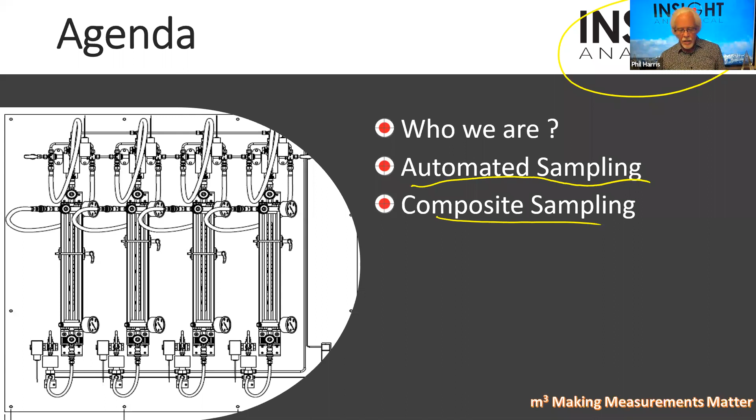Insight Analytical is a Calgary-based company. We're a systems integrator and distributor for other manufacturers. We operate a Northeast Calgary, 20,000 square feet facility, 9 bay doors, 10-ton overhead crane. We can pull a full analyzer building in off the back of a flatbed, drop it off inside, do all the systems integration, and lift it back out again.

We're an AB 83 compliant fabricator. For those of you who aren't from Canada, that probably won't be significant, but in Canada we have CRN numbers, where we have to have a Canadian registration number for anything that's pressure containing and going into a process facility. This just means we're compliant with being able to do that kind of fabrication. We put CRNs on equipment for Alberta, BC, Ontario, and Saskatchewan.

Personally, I come from a background with a company called Western Research. We developed analyzers for sulfur recovery units and for natural gas processing, and this company has been around for over 50 years now. A bunch of the people who work with me have all come from there, so I've had the benefit of bringing in people with a lot of experience in this industry.

We have excellent documentation capabilities, and this becomes really important when we're working with large engineering companies on projects. My drafting guy is fantastic and has been doing analyzer drafting and analyzer system drafting for over 30 years now, so we do a really good job on the docs packages. I'm really proud of what we do there. We've had compliments from engineering companies, and that's hard to get usually.

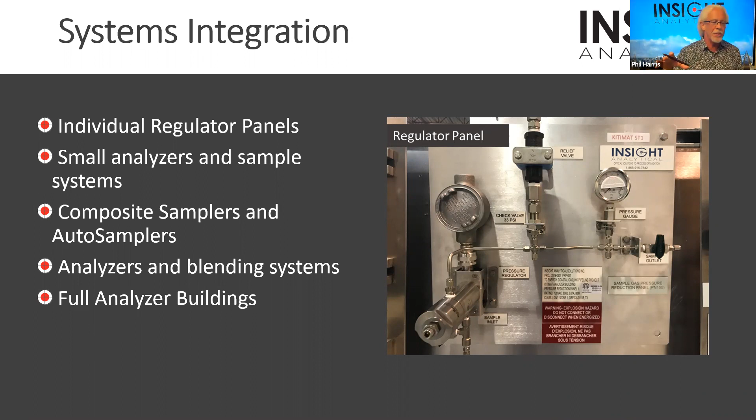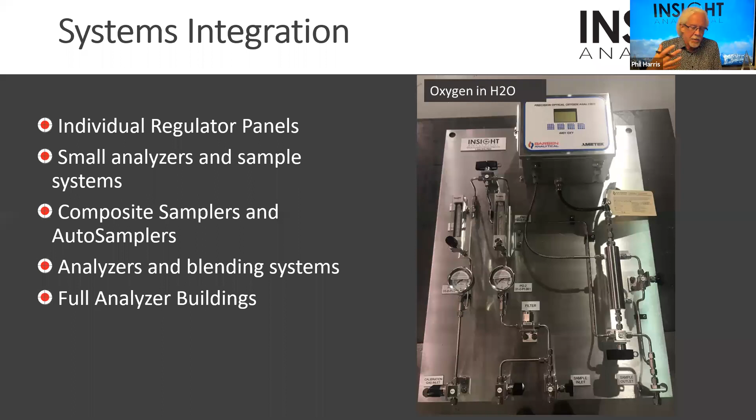As I said, we do full systems integration. We'll do everything from little grab sample panels, individual regulators - we did all the sample systems for Coastal GasLink Pipeline for TC Energy - to small analyzer panels, like this little oxygen, dissolved oxygen in water analyzer. We've done dissolved oxygen in hydrocarbons, and we'll integrate the sample systems, small sample systems, around analyzers.

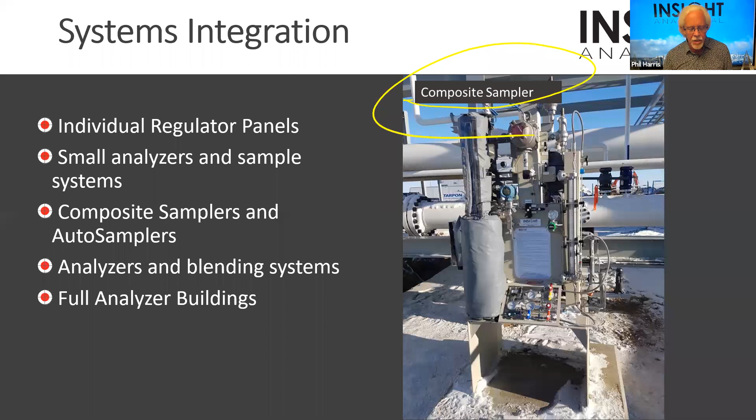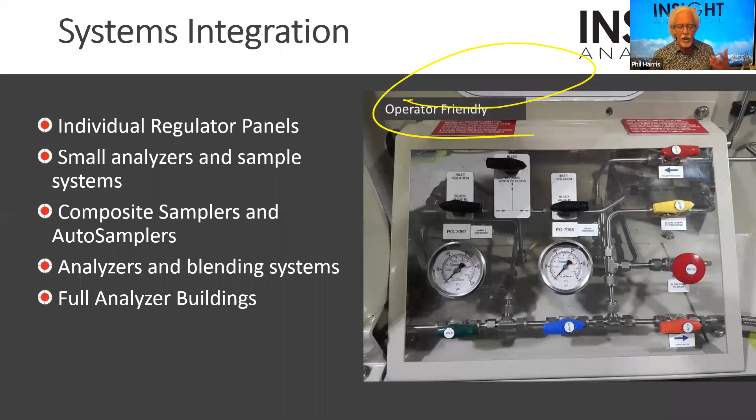Second, we put together full composite sampler systems, which is one of the things we're going to talk about today. Again, we come with a lot of industry experience, so we come at this pretty honestly - we know how hard it is to do things in the field sometimes. You'll notice on one like this we've got a little instruction panel for how you're going to use this device, put right onto the back of the composite sampler. All the instructions for how to charge the composite sampler, pull a sample off of it, etc., are right there. You'll notice there's a bunch of colored valves at the bottom - those are all covered in those instructions. When we put a system together, we try to make it as operator friendly as we can.

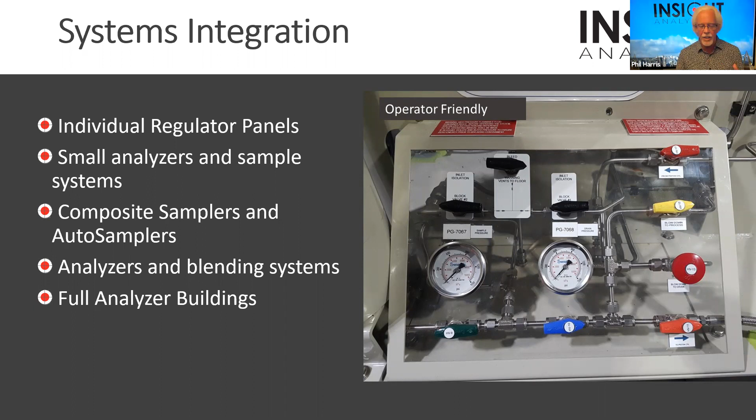So we know lamicoids fall off in the field and get sun bleached. So we'll do things like color code valves and use different shaped valve handles, so we can make it easy for operators to understand how to actually use this device. If there's a pattern or sequence that has to be followed, we want to make it easy for an operator to follow that sequence when pulling a sample.

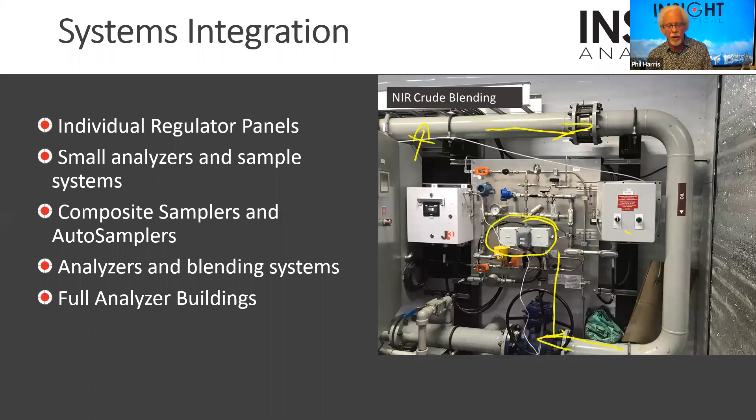We do analyzers for crude oil blending, or for blending condensate into crude, or butane into crude for vapor pressure control, or for sulfur blending. This one is sitting on a crude oil blending skid. We've got crude running through these pipes, and they're injecting butane upstream of where we're measuring. We're pulling a small sample off to a little infrared optical bench right here, connected by fiber optics to an analyzer over here. We use that infrared analyzer to do real-time vapor pressure measurements, so we can monitor the vapor pressure of crude as the butane is added, trying to hit pipeline specifications.

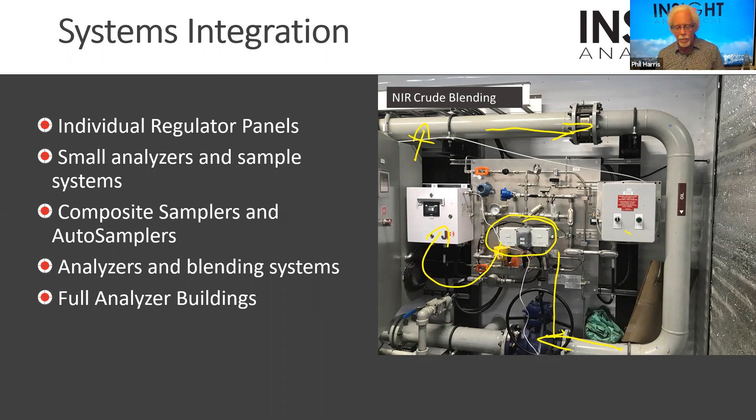Oops, let me get rid of my ink here. When I animate these slides, I end up with all kinds of drawings on there.

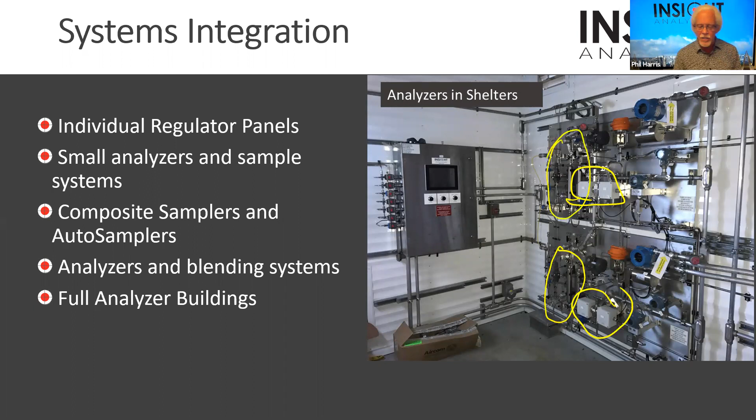When we do automated sampling panels, we can have multiple cylinders. In this one, there are 4 floating piston cylinders sitting there waiting to be filled. You can see the actuated valves above and below. We control the entire fill sequence with a PLC sitting off to the right. We build all the code around it to control that sequence and how those get filled. There's a control valve up top controlling the fast loop through a shelter, a Coriolis meter, and a couple of analyzers tied to this whole thing.

One of my favorite pictures is this one, where that same panel is there along with 2 composite samplers. We have an automated toluene flush. A lot of times when dealing with some of these hydrocarbon liquids, they're really waxy, and you can get systems that plug and wax off. So we build a system in place that we can fill with toluene and back flush the entire system automatically, cleaning out the sample system as needed. In this case, we have an infrared analyzer that can see a change in how much light's getting transmitted, letting us know we've probably got some wax buildup in the cell, so let's give it a back purge of toluene.

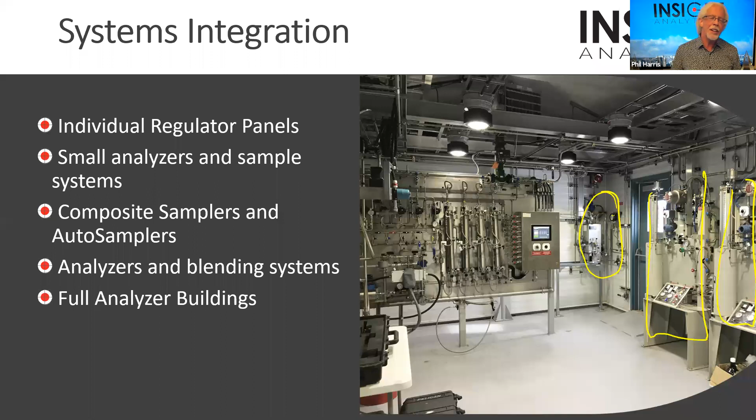On the integration side, we're willing to take a look at pretty much any kind of package, large or small.

Now I want to move on and talk about sampling hydrocarbons. There are 2 kinds of samples that commonly get taken. One is what we often call a grab sample or spot sample, and when we do that, we pull that whole sample at once. Imagine if my glass of water was my sample: I walk out to the valve and say I want to see what's in my water right now, and I fill this whole glass up. So that sample reflects what's in the process at that moment in time, assuming it was collected properly and wasn't biased in any way by how we took it. We want to talk a bit about that, because that's one of the things we try to deal with when we automate a sample system.

The other type of sample that often gets taken is what we refer to as a composite sample. These are samples taken periodically over time. Imagine instead of filling my glass up all at once, I let the water drip in over the course of a day. What would be in the glass at the end of the day reflects the average of what my water looked like during the course of the day.

These often get used for custody transfer, when I want to know what a particular plant or producer shipped. I always like to pick on Dale when he's here because I know he's a good sport. Dale's a producer of crude oil shipping it into my pipeline. I want to take a measurement over the course of a day or a week to know what he gave me on average. This lets me know, if I take that sample over a period of time, whether on average he was on specification.

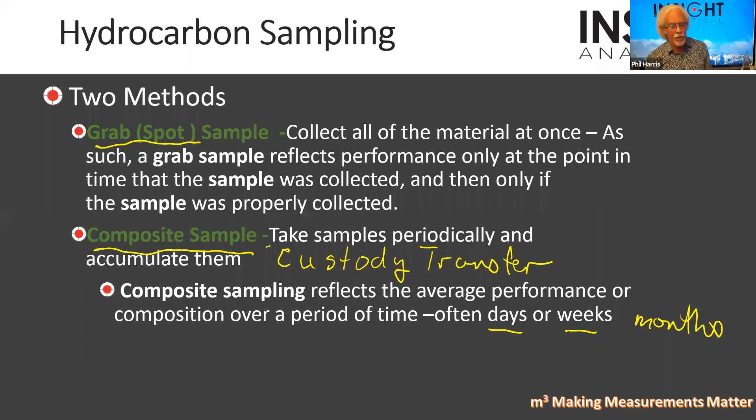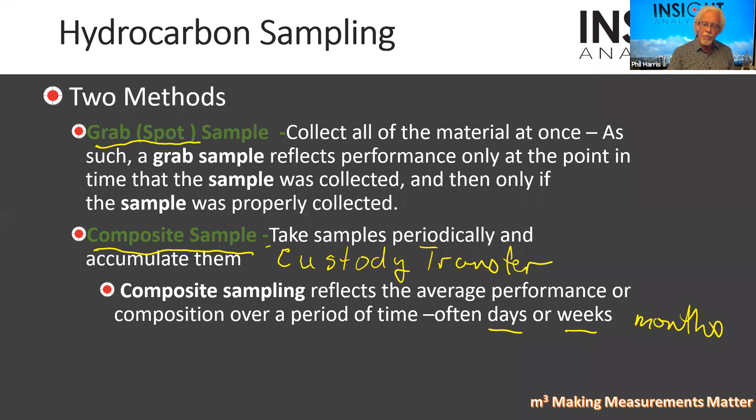Good question. There's both. So usually it's a contract between the producer and the supplier that defines kind of what they're going to do and how they're going to do it. But on the natural gas liquid side, so things like propane and crude and condensate, a lot of this gets covered by Directive 17, Alberta Energy Regulator. So AER has some specifications as to how composite sampling is supposed to be done, and how, because again, some of this reflects back to how the tax revenue gets generated too - to know the value of the product that went through there. So of course there's a government involvement as well.

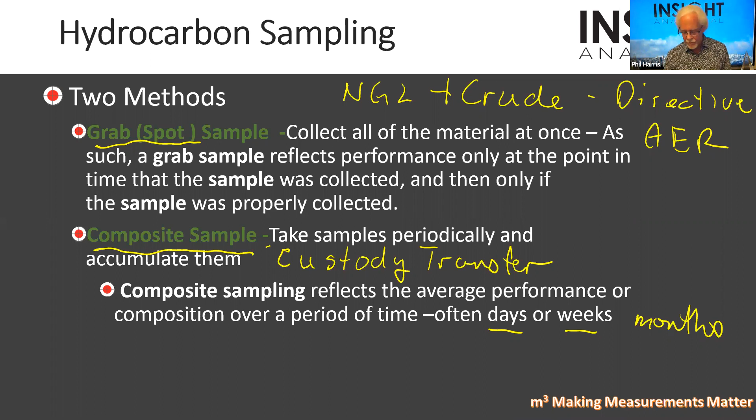So we commonly do spot samples or grab samples if we want to try to evaluate how a process is running at a certain time and under known conditions. So we'll go out to the field and pull a sample so we can take it back to the lab, or to an analytical company that's maybe on site doing testing work for us, and let them make some measurements of how our process is running. And then we can use that data to further optimize our process. So we may pull these so we can get some idea of where we're at and do some process optimization.

We may also just want to measure our product quality under known operating conditions. So if I'm running a condensate stabilizer and I'm trying to boil out enough butane to hit a certain vapor pressure specification or hit a certain C4 concentration that I'm allowed to put in the pipeline, if I don't have an online analyzer there, I want to go out and pull a sample and see how we're running.

There are also types of analyzers that we refer to as inferential analyzers - things like near-infrared spectrometers, nuclear magnetic resonance analyzers, Raman analyzers. A lot of these have to build a model in order to predict what's going on in the process, and they build the model by comparing spectra that they measure against known process samples. So we sometimes are pulling these grab samples so we can help ourselves build these models. So there's a bunch of reasons that we want to do them.

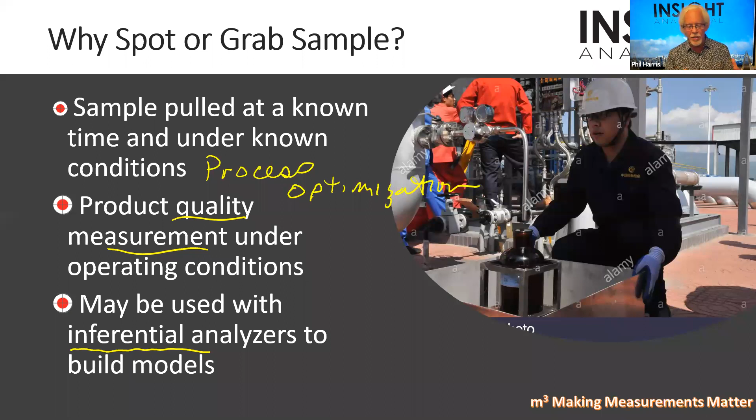When we do these for volatile liquids, for things that are going to bubble fairly easily, we want to make sure that we get a representative sample. It's always a big deal in our industry. We want a sample that really gives us representative information about what was in the process.

If I had a water bottle right here, or a bottle of 7-Up, and I wanted to measure how much carbon dioxide was in that bottle, I'd have to make sure I didn't take the cap off first, because as soon as I let the pressure off, those bubbles are going to escape and I'm going to lose some of that carbon dioxide.

So when we want to take samples that we know have dissolved gases in them, or that have very high vapor pressure, we want to pull those samples in a way that ensures those volatile things—the propanes, the butanes, the H2S, the carbon dioxide, whatever they are—don't escape.

There are 2 common methods we use to do that. We'll either fill what we refer to as a floating piston cylinder—you won't have to zoom on this because he's pretty big—but floating piston cylinders are basically a steel tube that have a piston inside of them.

What we do is we back pressure one side of it with nitrogen and push that piston right to the top, connect it to the process fluid we want to measure, and then start bleeding that nitrogen out. Slowly, as the process pressure overcomes the nitrogen pressure, it pushes the piston back, but it keeps the whole sample under pressure the whole time.

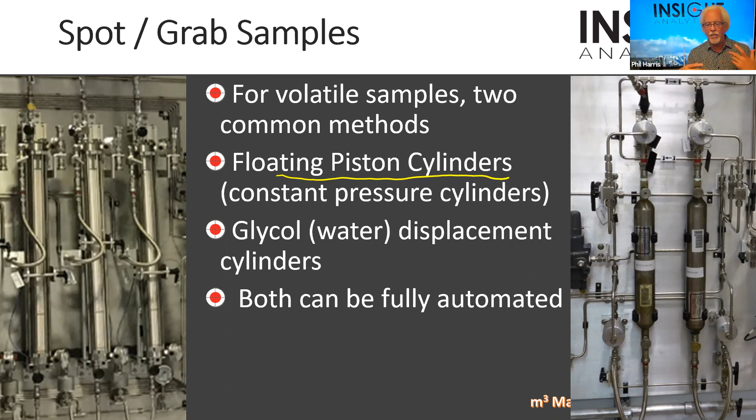So the issues that happen with manual sampling are often that the proper sampling procedure isn't followed.

Organizations like API, American Petroleum Institute, Gas Processors Association, the GPA—they all write specification documents. Crude Oil Quality Association writes a specification document that says this is how you should properly pull one of these samples. A lot of people don't read the manual.

They just say, I'll just pull it the way I learned to do it. Joe showed me how to pull a sample 10 years ago, I'm going to go pull it that way. Well, a lot of people don't pull the sample properly.

Then they don't write down the information properly. If you're in a refinery and you're the guy who's supposed to pull the 2 a.m. sample off the bottom of the debutanizer, and you're walking by the debutanizer at 1 a.m., you pull a sample and you write it down: that's my 2 a.m. sample, because that's when you're supposed to pull it, and you were there earlier.

So now they go back and try to compare that sample to operating conditions, and they go, geez, it doesn't look anything like the way we thought the debut was running at 2 a.m.—because it wasn't a 2 a.m. sample.

The other issue we have with manual sampling is we maybe don't have anybody available to pull the sample. Plant goes into upset, I want to pull a sample. Plant's in upset, all the operators and technicians are scrambling to try to get the plant out of upset conditions. There's nobody available to go pull that sample. It's the middle of the night and nobody's there.

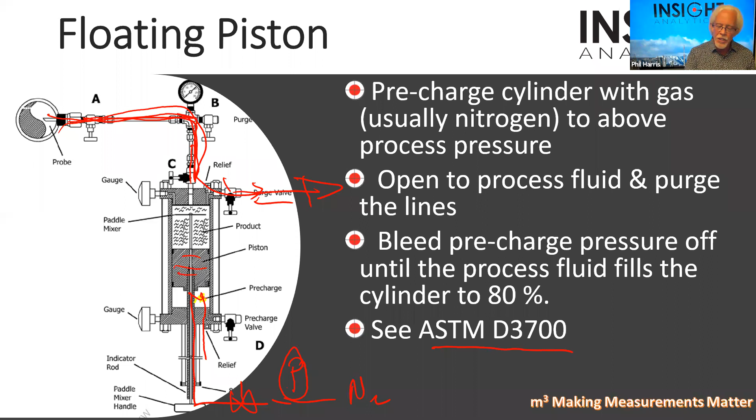This valve, the valve on the nitrogen side, needs to open, and now we can start bleeding off that pressure. We want to bleed it off at a certain rate so we don't fill that vessel too fast and let it start to bubble and flash on the way. So this is what I mean, that if you want some control around this, if you send 3 people out in the field, give them each one of those floating piston cylinders and say go pull me a sample, they'll each do it differently. One guy goes, I don't want to stand here 5 minutes for the purge, it's cold outside, so he cracks the valve on the purge side, shuts it, and fills his vessel. The other guy says, I don't have to worry about bleeding that nitrogen out slow, I'm just going to crack open that valve and let her rip. So depending on how they pull their sample, they're going to bias the results.

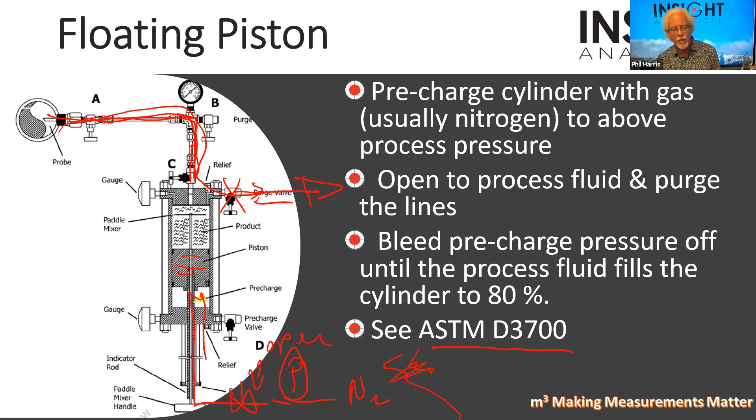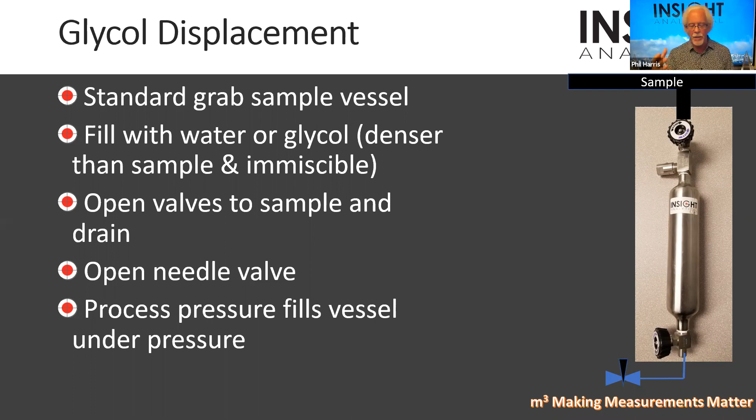On the glycol displacement side, it's similar. We have this whole vessel. We take a standard grab sample vessel like the one I showed you, fill it with water or glycol, something that's denser than the sample we want to measure, that's immiscible in the sample we want to measure, and is not a chemical we want to measure.

If we're trying to do water and crude, we can't use a water-backed cylinder because we'll get water into our crude as a measurement. So we fill this vessel up with some fluid, let's say glycol. Our process sample, the black fluid, is crude oil. We open the valve, let the crude oil pressurize that glycol. Now everything's at equalized pressure. We open the bottom valve and slowly start to bleed the glycol out. As we do, the vessel fills over time with crude oil, staying always at constant pressure, constant temperature, no phase change.

Fill that vessel typically to 80%. Remember, this might be a volatile fluid. So now we seal that fluid in.

We bleed off some more of the glycol to leave a little bit of a gas headspace. The reason we do that is if we took this vessel and filled it completely with a volatile liquid, like condensate or LPG, filled from top to bottom, and let it heat up, the liquid is going to expand. And when it expands, it generates tremendous pressures in there, which is why there's usually a relief valve, so that if it overpressurizes, you don't burst the vessel. So by bleeding some of the glycol out, we create a gas headspace that, when the liquid expands, just pressurizes the gas headspace a bit.

When we get it back to the lab, we push glycol in from the bottom again and compress everything, so any gas that vaporized up here is pushed right back into the liquid. We get it back to the same conditions with no gas headspace before we do any kind of measurement.

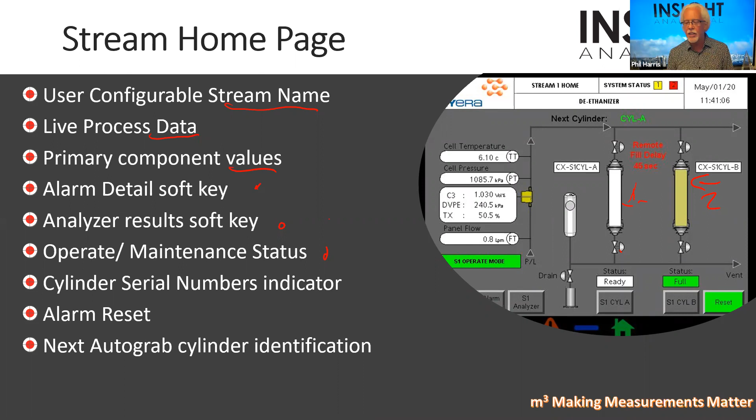Phil, we got a question here in the chat. It's coming from Mike Strobel. What is the typical pressure difference between the nitrogen charge and the process fluid in the piston samplers?

Strobes, how you doing? Hi, Mike.

Usually we look at what the maximum process pressure they expect to have and put the nitrogen pressure 10% over that. So if they say our pipeline normally runs at 100 PSI here in the States, but our maximum pressure is 150 PSI, we'll pressurize a cylinder up often to 165 or 180 PSI. That way the nitrogen back pressure is more than the process pressure. Then we can start to bleed the nitrogen off, have a pressure transmitter on the process side and on the nitrogen side, and say the nitrogen pressure has just dropped down to the process pressure, so this thing should be starting to fill now. So that's how we know when it should be starting to fill.

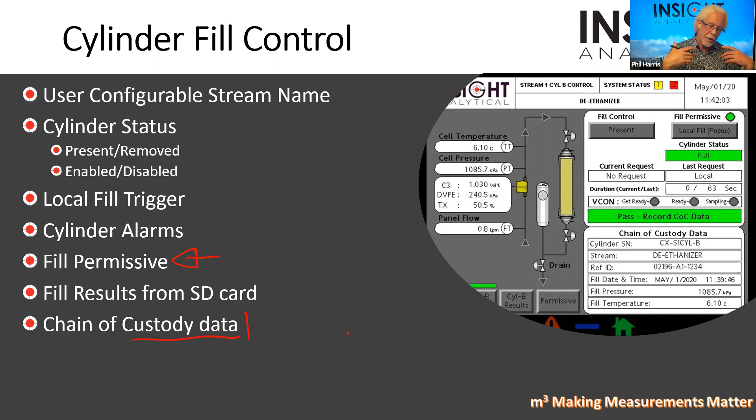And of course, because we're putting all that into a PLC, now we have all that chain of custody information. We know when it was pulled, we know what the flowing process conditions were when it was pulled, and all the things that the lab is going to need in order to take that data and make it into something useful that we can use for either providing feedback to operations on how they were running at the time, or for chain of custody transfer information.

If we are doing this with a floating piston cylinder, we add in piston sensing devices. The specification, ASTM D3700, says you're only supposed to fill the piston 80% full. So we put a magnetic sensor, a magnet in the piston, a magnetic sensor at the top, and a magnetic sensor at the 80% mark. So we know if the piston is up at the top, that piston hasn't been filled at all yet.

We open the system up, we initiate the fill, we see when the pressure of the nitrogen drops below the pressure of the process, and we know that's when the piston should start to move. So we watch on the PLC, did the piston start to move? If not, maybe it's stuck and we're going to give an alarm saying we got a false fill going on here. Or we watch and see that piston move down until it hits the 80% magnetic sensor, and that says stop bleeding off any more nitrogen - that piston is full enough now. So again, we can put all of this under PLC control and fill this exactly to the way a set of standards or guidelines says it's supposed to be done.

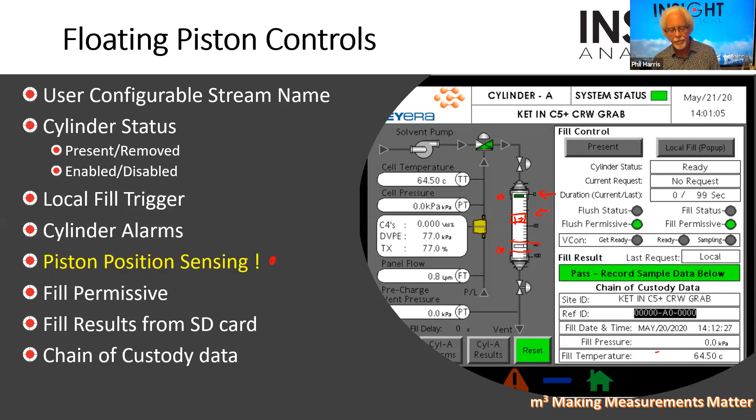We also provide complete error tracking diagnostics, and we can customize all these controls for different applications. One that's come up a lot has been truck loading and offloading. People say, well, I'm buying propane from Dale, and I know Dale's a shiesty character, so when a truck comes in from his plant, I want my PLC to have the operator of the truck say what plant he was from. When he starts to offload, I'm going to pull a sample from Dale's trucks, because I want to see if Dale's actually shipping me on-spec product. Or I could say I'm going to pull a sample from every truck that comes through the bays. Or, when we talk about composite sampling, I can fill a cylinder just part way based on Dale's truck and average over the month all the trucks that Dale sends me. So there's ways we can do this as both a grab sample and as a composite sample.

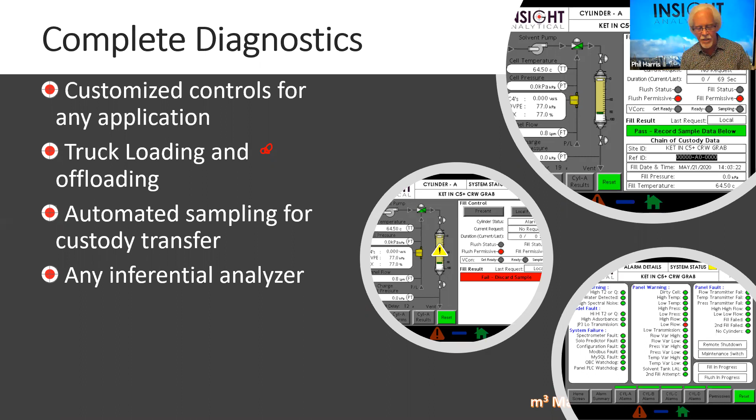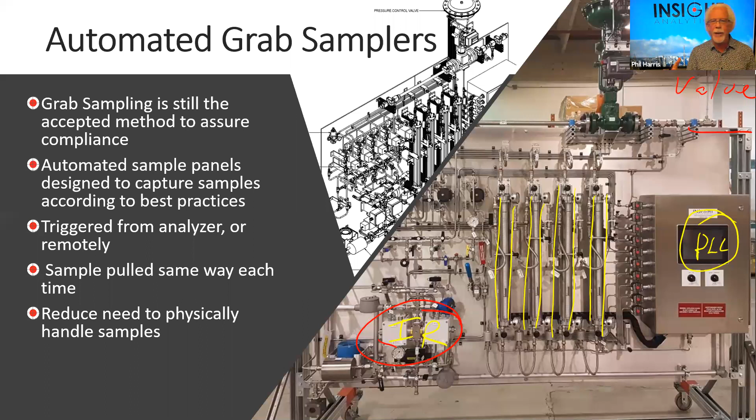And over here are my 4 pistons waiting to be filled. So these allow us to pull grab samples whenever we want, PLC to control the whole thing. So if the analyzer sees off-spec product, if the analyzer sees a product that it doesn't understand, it can say, I want to fill a sample right now. Or if the end user says, I want to check and see if that analyzer is reading right. Right now it says I'm at 4% butane. I'm going to pull a sample, send it over to the lab, and the lab can tell me whether the analyzer was reading correctly.

Big benefits are that we can trigger it remotely, pull the sample the same way each time, and there's no need to physically handle any of these samples.

The only thing an operator does is put an empty cylinder into the rack. Once it's in the rack and it's connected to its quick connect system, which can isolate it, it's connected to other valves, opens the valves on the cylinder and he walks away. When he comes back to take a sample out, the only thing he has to do is close the valves on the cylinder. All the other valves have been controlled under the PLC control. Quick connects are there to protect it from any other leakage around the valve. Close the 2 valves and take the cylinder out.

It's relevant because there's been situations when people are sampling things like LPGs, liquefied propane. They start filling the cylinder. If they overfill it, the propane starts to blow out. It flashes and it gets really cold. So guys will have gotten basically frostbite on parts of their body because of the fact that they haven't closed the valves properly. So we do this as well because there's an HSE advantage. And certainly if you're starting to talk about pulling samples that have high levels of H2S or high levels of other toxic chemicals, putting an automated system in there provides us a way to protect our operators.

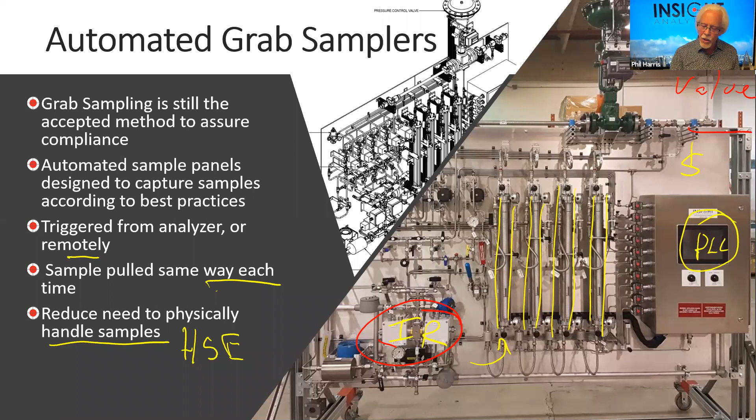Again, we have a client who's looking for one who's just one cylinder. It says, I want to be able to pull a sample off my pipeline in the middle of the night and find out if that guy's blending off spec or not. I just need one sample. So we'll do as many cylinders as necessary.

We can build in triggering capabilities from the DCS, from any other remote system, local control. We can do these with all electric actuation, all pneumatic actuation, full date and time logs of the PLC, interface it to any online analyzer, even your gas chromatograph. You have an online GC and you say, boy, I'd like to take a sample once in a while and check and see how that GC is doing.

This lets us date and time stamp things. We can have data from the GC feeding into the PLC. So we know what the GC was reading, when the lab sample was taken, and then we get what the lab results are. So this provides us a means for reliable, repeatable grab sampling, full chain of custody, no human intervention.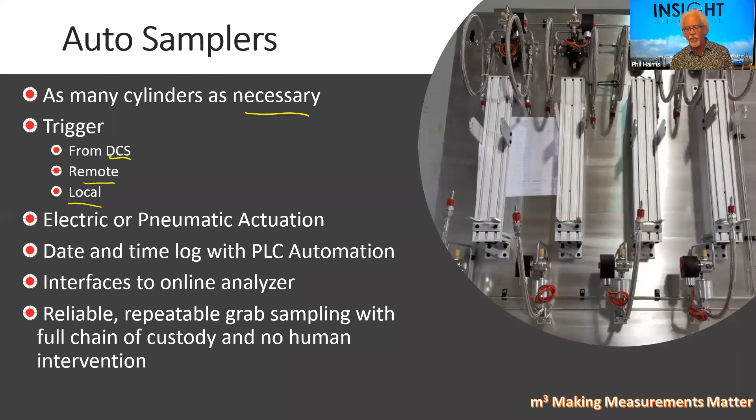Typical applications we've seen have just been process grab sampling from NGLs. This could be C3 plus streams, C5 plus streams. Guys, you say, I just want to be able to take a process sample and have a lab guy show up and pick up the sample and take it to the lab and analyze it.

Truck rail loading and offloading. Sample trucks, as they're loaded or offloaded. We want to know what product did we put on there. Do we put the right product in? We have a client out in Ontario who puts propane and butane to cavern. Before he unloads a truck, he wants to say, I got to pull a sample and make sure I've got the right material going off to that cavern. I don't want to put butane into my propane cavern.

Grab sampling during crude oil or condensate blending operations. Again, if we're going to run 24/7 blending skids, we might want to be able to pull samples day and night and not necessarily have operators have to go out there and get them.

Other samples we can consider are things that are just difficult to sample, rich and lean amines, things that have high amounts of H2S in them. Anything that we're worried about gases evolving from, we want to look at putting some kind of way of keeping that fluid under pressure. So things like amines and glycols.

And then we can tie this into any inferential analyzer. FTIR is in a refinery doing gasoline blending. And you say, well, I want to be able to pull samples whenever I need to. Hook this up, connect it to your FTIR. FTIR goes into fault, says pulls the sample right away.

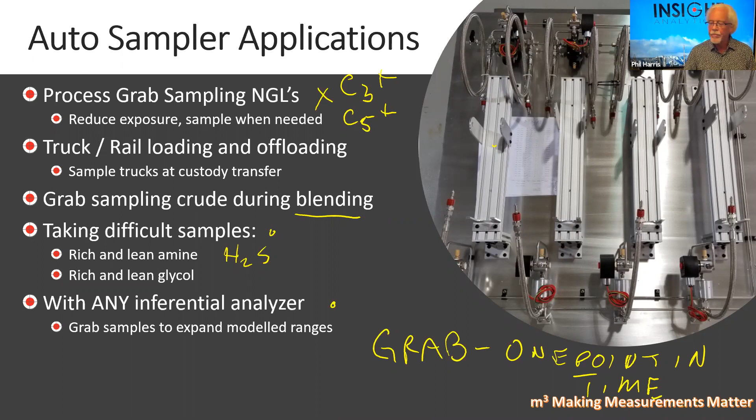Composite sampling is done to give a time or volume proportional sample acquired over a period of time. We call it time proportional or volume proportional because either we say every 15 minutes put a shot into this vessel, every 15 minutes put another weight onto the scale. Or volume proportional, for every 50 barrels of crude oil that goes by, put a milliliter into this cup and let it fill up over time. Now it's going to give me the average on a flow weighted basis of what will flow by in that pipeline.

So the composite sample represents the average of the process fluid or flowing fluid over a period of time. And we use this to say, on average, did the product that I purchased meet my specification, and what was the value of that product?

If I'm buying crude oil or condensate, for example, condensate has a difference in price based on its density, based on its sulfur content, based on its vapor pressure. So there can be different specifications. I want to know, based on an average over time, the stuff that Dale sold me in the pipeline, what was his stuff worth?

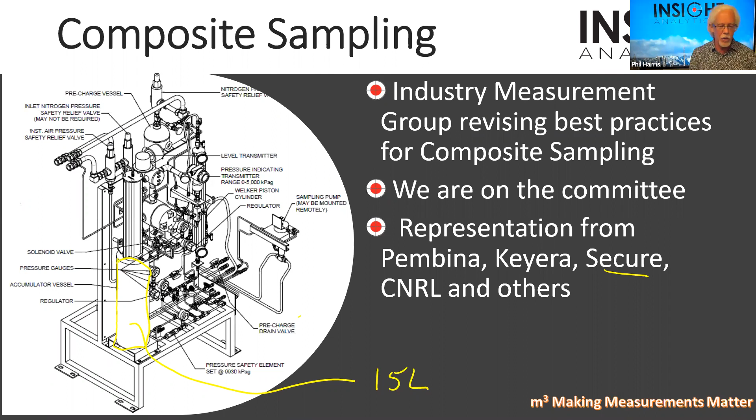That committee is being represented by Pembina Pipelines, Keyera, Secure, Jarrett Torres from Secure is running that committee, CNRL, and a bunch of the other oil and gas guys here. A couple of the relevant reference standards are API 8.2, standard practices for automatic sampling of petroleum products, and the Alberta Energy Regulator's Directive 17, Chapter 8.

We want to talk a little bit about how these work. So the way these usually work, simplified version, is we have flow going down a pipeline. We've got a probe that can extract a sample, and we've got a small pump. This pump is not continuously operating, it's a one-shot pump. Give it a shot of air, and it injects one stroke.

So most of the time, there's nothing happening, and fluid is flowing along down this pipeline. And then some type of control system says, okay, I would like you now to open this valve and take a shot with the pump. The pump pushes a small amount of fluid over towards this accumulator. So the pump stroke might be set to deliver 1 milliliter.

This might be a 15-liter cylinder. So we could slowly fill that cylinder up by putting a whole bunch of 1 milliliter shots into it. And they might say for every 10 barrels of crude oil that goes by, put a milliliter shot into that accumulation vessel and let it fill up over time.

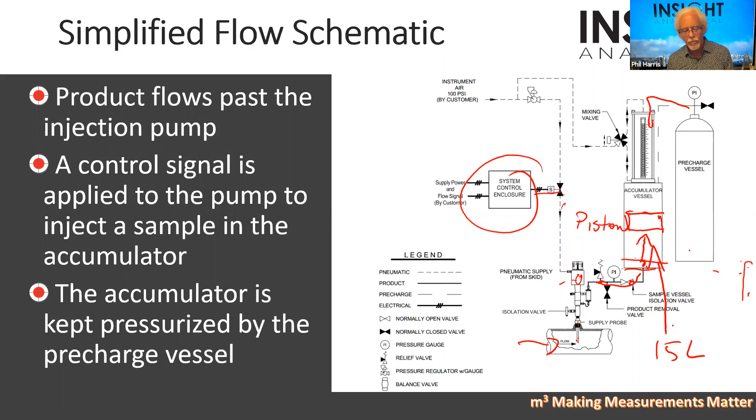The main parts of a composite sampling system are the accumulator vessel itself, this is where the fluid actually goes, and the pre-charged cylinder, which is the back pressure gas.

API 14.2 says there's got to be a continuous measurement of level, so there's a level transmitter there that says how full is that cylinder.

Because this accumulator is so big, 15 liters, it's made of steel, it's really heavy, you're not taking it out to take it to the lab. So there's got to be, or there should be, a way to pull a lab grab sample off. And you'll see over here what we've got is another one of those floating piston cylinders that's hooked up through this valve assembly down here, so we can pull a sample off of this cylinder when we need it. I'm going to talk about the process by which that happens in a few slides.

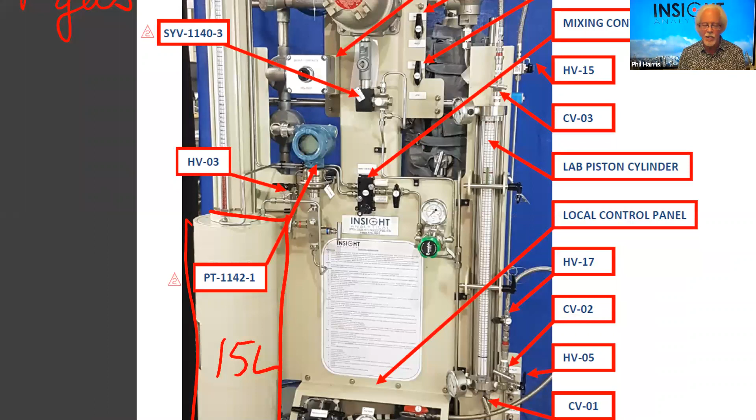This operational valve assembly is how we control everything. Injection pump, not shown on here, something to put it in there, and a thing called the mixing valve right here that I'll talk about in a minute as well.

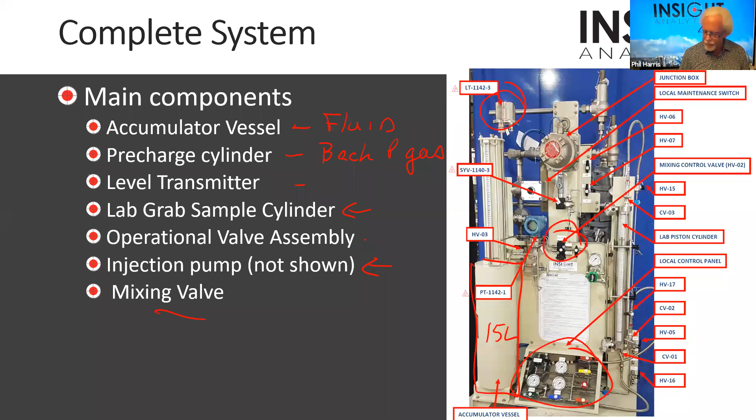The relevant thing, the sales pitchy side of things I'll mention, is that we were approached by a major producer who said, in Canada especially, we can't get composite samplers that have full CRNs and meet all of our specifications and requirements and can be customized. So we had the pleasure, the honor, and the opportunity to work with a major producer to design a customized composite sampler that meets all your needs, meets everything in API 14.2, meets everything that Directive 17 wants, and makes it easy for people to use and can be customized.

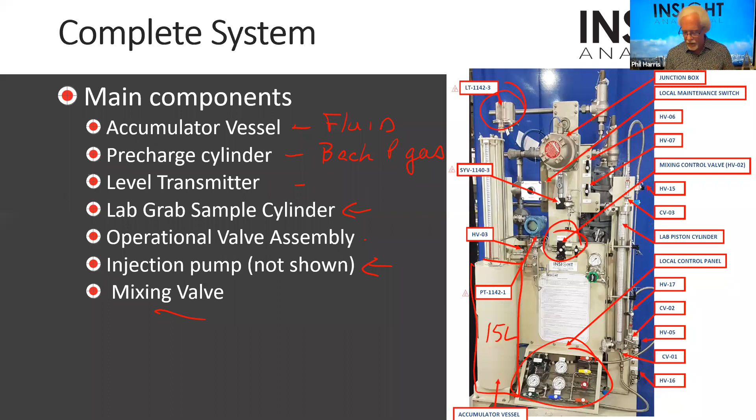So part of this whole system starts with the probe. A probe is always recommended when we want to get a representative sample. We'd like to get a sample from the central third of a flowing pipe, that's where things are best mixed and most relevant of the process fluid. As we go near the walls, that's where more contamination builds up, and that's where we're less likely to get a good sample. So we put a probe in and we try to sample from the central third of the pipe. We also want to be sure that whatever's in that pipe is well mixed.

So upstream of this, we may well want to see something like some mixing vanes, what we sometimes refer to as a static mixer, so that the fluid has to flow around these things and mix. There's also things like cojet mixers, but we want that fluid in the pipe to be well mixed. If we grab a spot sample, and people see this especially in stack gas analysis, depending on where you put your probe in the stack, you can get a different number because you have stratification and flow variations across the stack diameter. Same thing happens in a flowing pipeline.

Even worse, if we're trying to do measurements like water in crude, the water tends to build up at the bottom of the pipe. So if I sample from the top of the pipe, I'll almost never see water in the crude oil. If I sample off the bottom, I'll say there's a lot of water in that crude oil.

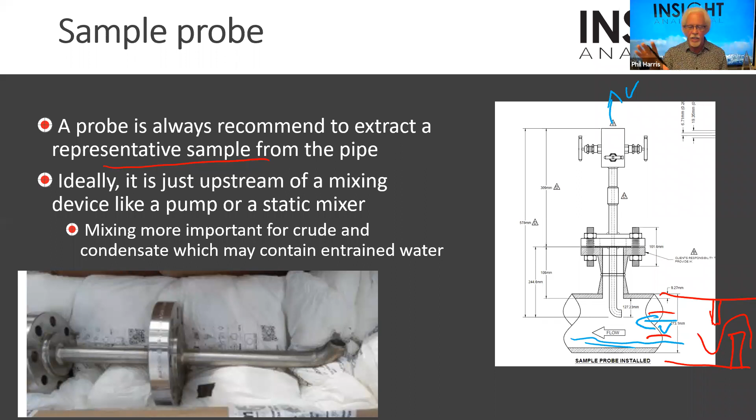To do that really well, we may also have to include what we call isokinetic sampling. We try to ensure that whatever the velocity is for the process fluid, we sample with the same velocity going up the pipe. It's the ideal case to do. It requires a little bit more complexity on the pumping side, so I'm not going to cover that too much here. But if anybody wants to discuss why we isokinetic sample, pull it up as a question and I'm happy to discuss it.

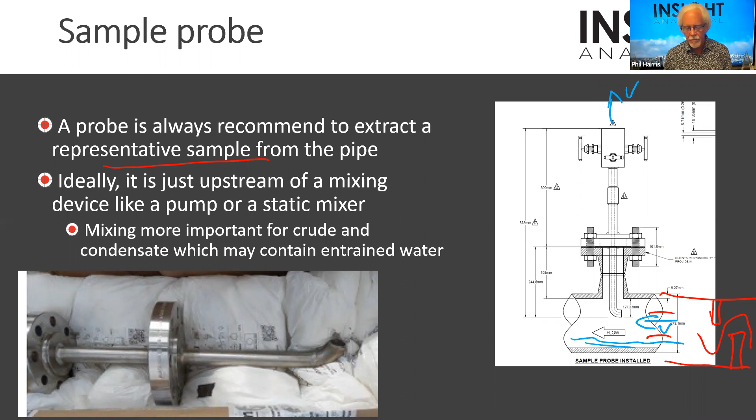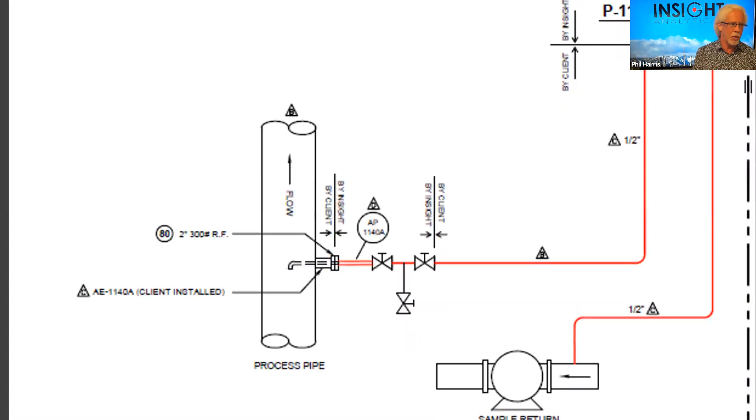So for the composite sampler in normal operation, stuff flowing up that process pipe, there's a probe sitting there, a pump near the top, and a continuous fast loop. Process fluid comes out and follows that red line, flowing past that pump, and there's some kind of sample return point. It may be a low pressure sample return in a process, or across a process pump, but there's something keeping continuous flow through that loop, up near where that object is, labeled P-1141. That's our little injection pump that's going to push things into the composite sampling vessel.

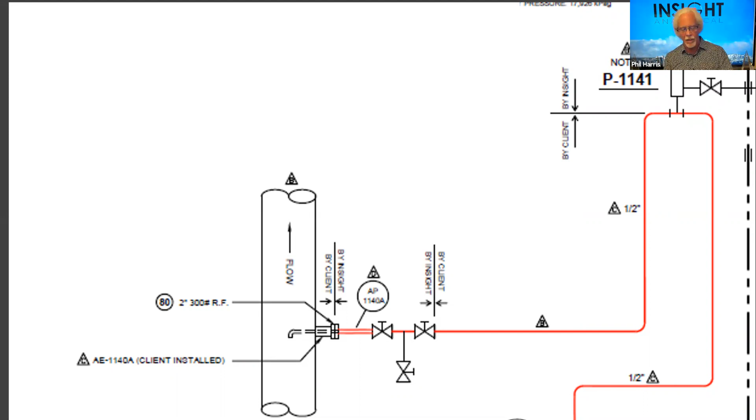As the right number of barrels go by, we may want to actuate that pump. So we'll talk a little bit about what that pump actually looks like.

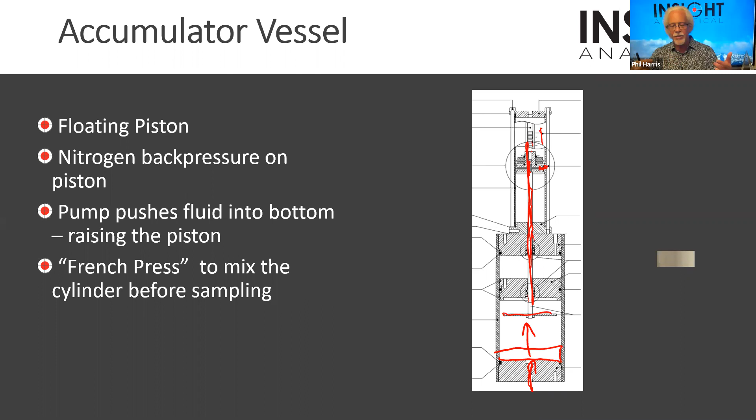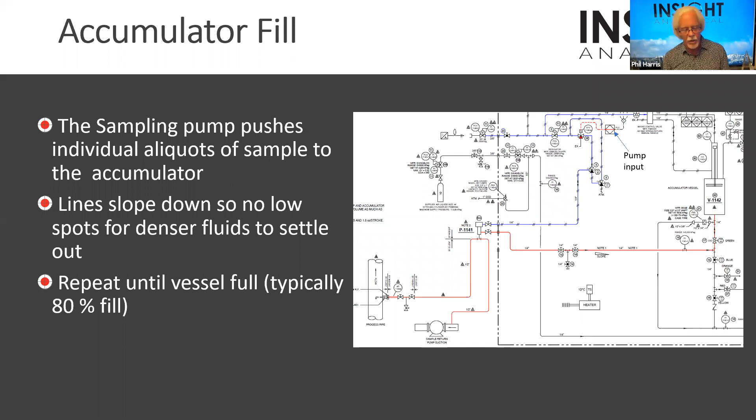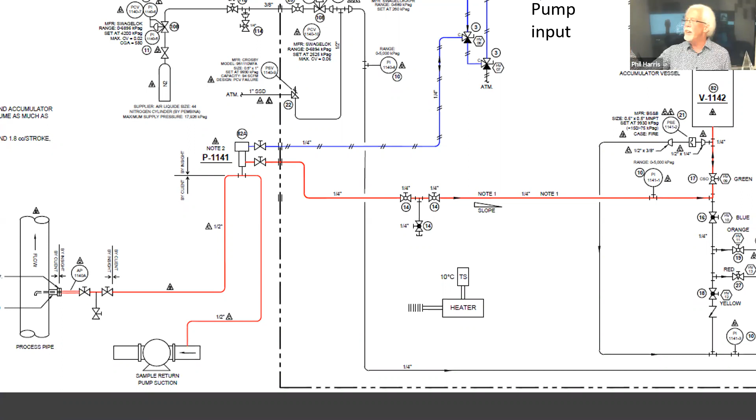When we want to fill this accumulator, the sampler pushes small individual aliquots of fluid over to that accumulation vessel. Now you can see the line that's in red. The line in blue is the air coming down to actuate that little pump. The lines in red are full of process fluid. We've had our continuous fast loop flow going down to that sample return pump suction, but now the pump is pushing red fluid over to V-1142, our accumulator vessel over on the right.

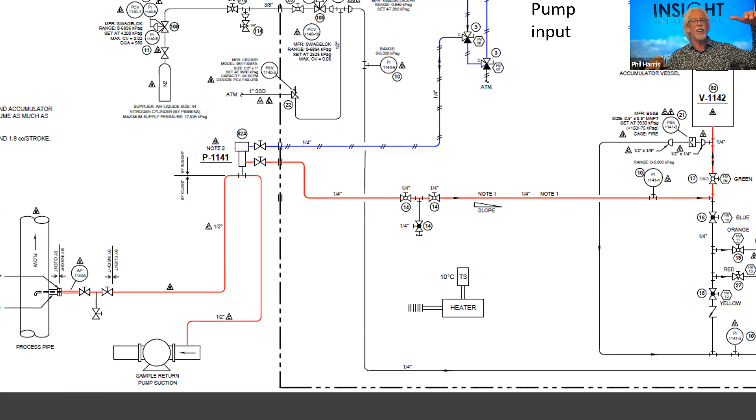You'll notice the lines are marked that they have to have a slope - another important part of API 8.2. If you want to do water and crude oil, or water and condensate, water's denser and it's going to settle out and sit in a low spot. So all the lines have to be designed to slope over to where the accumulator vessel is, so you won't leave a low spot that can pool up with water.

So the accumulator has to have a level gauge - both a visual indication of level that we see right here, with a set of magnetic flaps that'll flip as a piston moves by it, and we also have a level transmitter up here that allows us to continuously measure the level.

Again, API 8.2 says you've got to understand what your piston strokes are. You set it to push 1 milliliter a stroke. After 1,000 strokes, it should have pushed a liter, and that should have changed the level by this much. So we want to get feedback on that - is it actually filling the cylinder up properly?

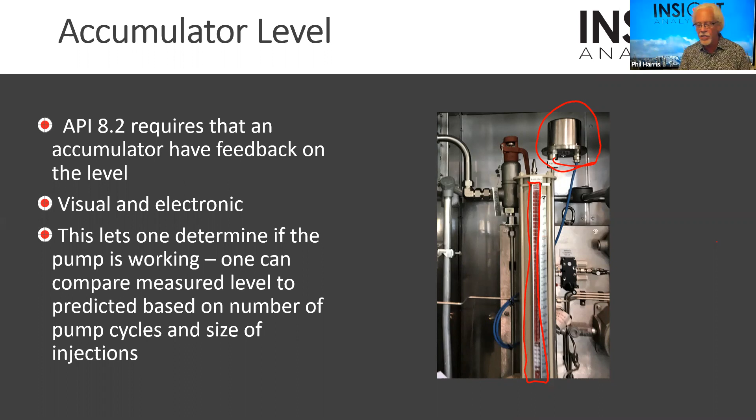Before we pull a sample off for lab analysis, we want to make sure it's well mixed. This comes back to that French press thing again. We have the ability to inject nitrogen pressure on top of this piston assembly up here. If we put pressure up there, it pushes that assembly down and pushes the French press down. If we inject nitrogen on this side, it pushes that piston up and pulls the French press back up again.

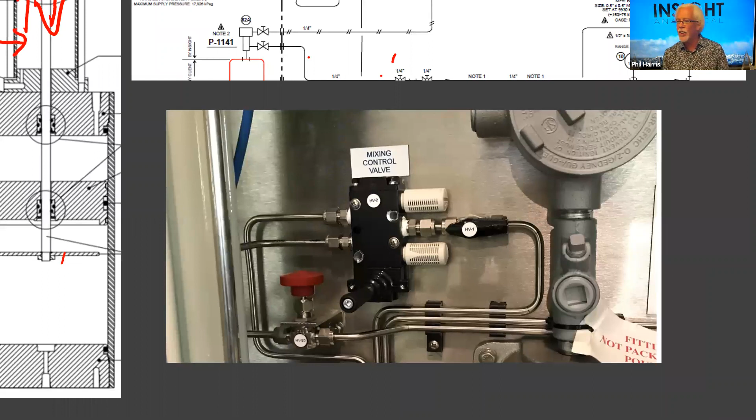So we have a thing over here at the bottom that we refer to as the mixing control valve. It has a little joystick on it and two breather ports - that's for the air to get released. The joystick says push the piston down, push the press down, or pull the press up. An operator, before he's going to pull a sample, is supposed to take that joystick and move it back and forth 6 to 8 times. API 8.2 says 6.

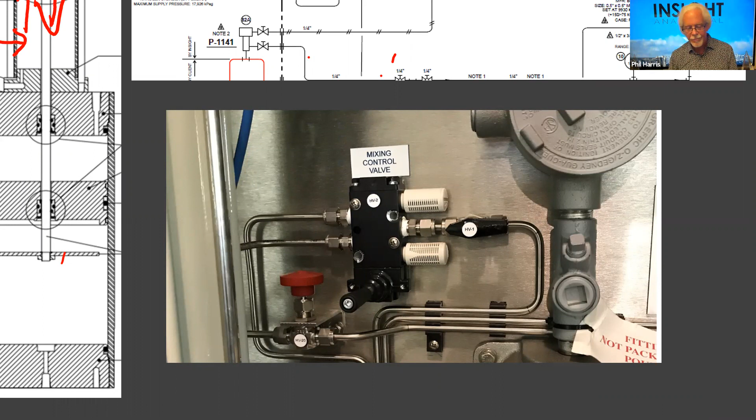When he's doing that, it's changing - you see these blue lines. The light blue one is the one that pulls the piston back up again; it comes over - let me see if I can put a laser pointer on here. The light blue line actually pushes and raises the French press back up again. The dark blue line, when it's actuated with instrument air, pushes the French press down. So this lets us move that thing up and down several times and mix that cylinder appropriately.

Sorry, I'm running a little bit late here on time.

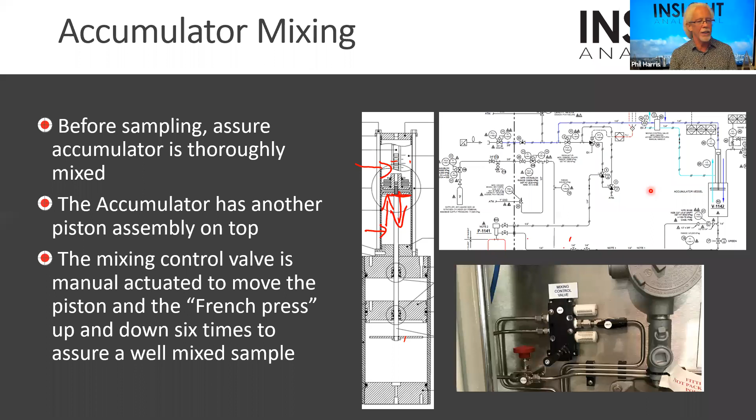Not too many more slides.

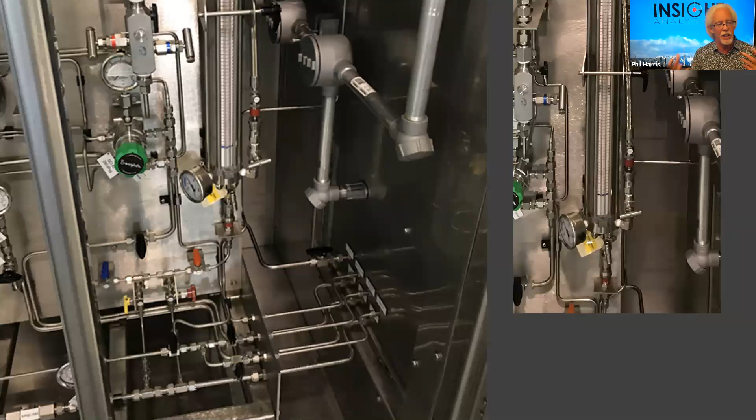We want to be able to pull a lab sample off, so we set this up so we can have a lab sample cylinder sitting off to the side, ready to take a sample off to the lab. Again, we go through a bunch of things to check to make sure we have double block and bleed on everything in case we have volatile or hazardous fluids in there, so everything's prepared to be bled off safely. Again, color coding valve assemblies makes it easier for operators to do things.

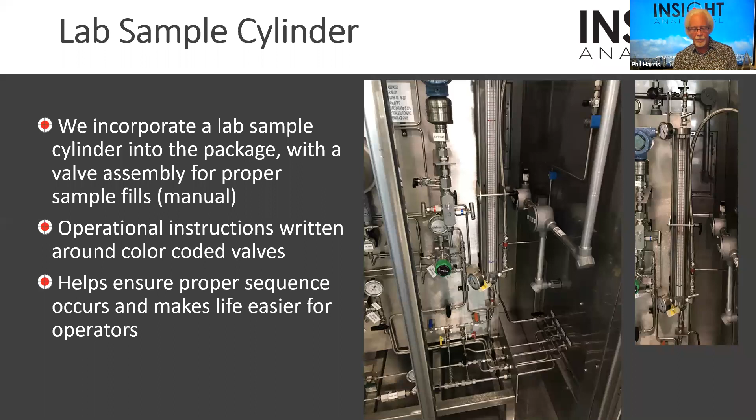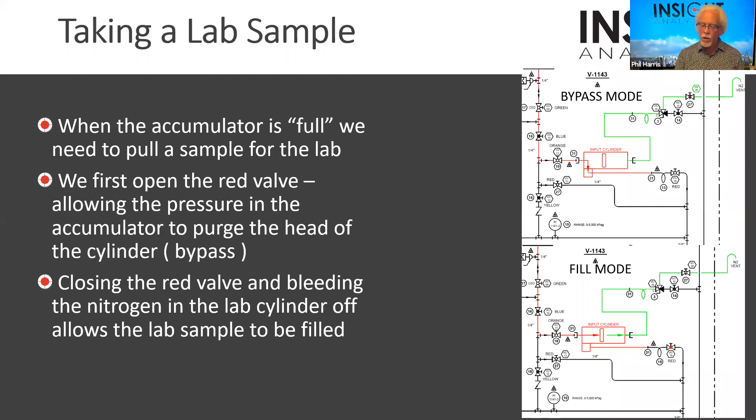Again, color coding valves just makes it easier for operators. A few different things on pulling the lab sample, similar to our automated grab sampling - we want to do this in the right order. So the first thing we do is run it in bypass mode.

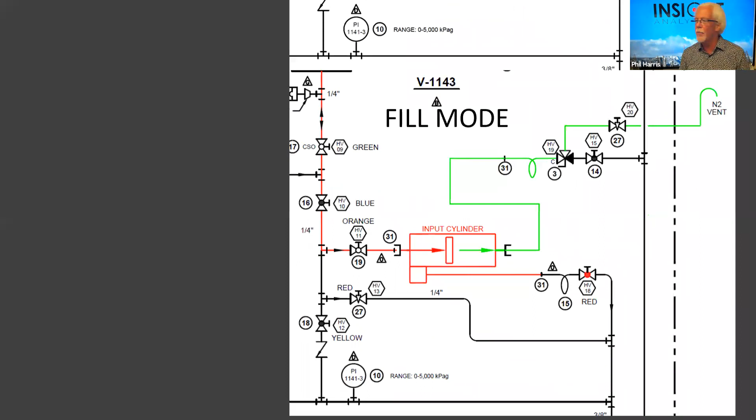Our sample is now moving through that red line and bleeding out just the head of the cylinder, but the green line isn't actually bleeding anything away yet, so we're not bleeding nitrogen pressure off. It lets us purge the head of the cylinder. And then when we go to fill, we close the valve on the bleed side, and that starts to push the cylinder head back, and we actually fill that whole cylinder up under pressure.

So in summary, composite samplers let us provide a solution for pipelines, for ship loading, for truck loading, where we can get an average sample that's taken over a period of time. We can provide the full package to do that, from fast loop pumps, sampler shelters and buildings, to the samplers themselves.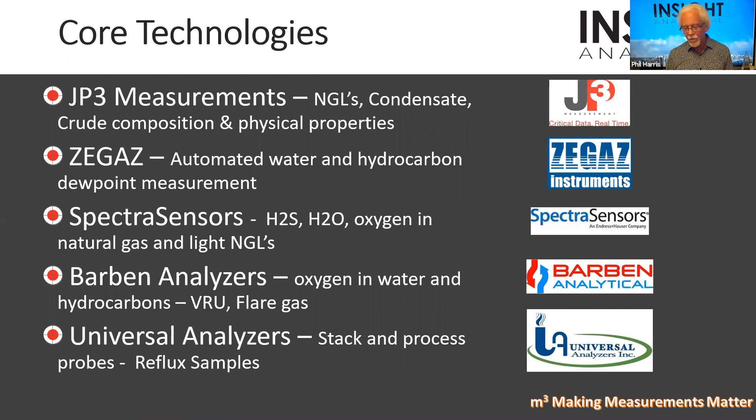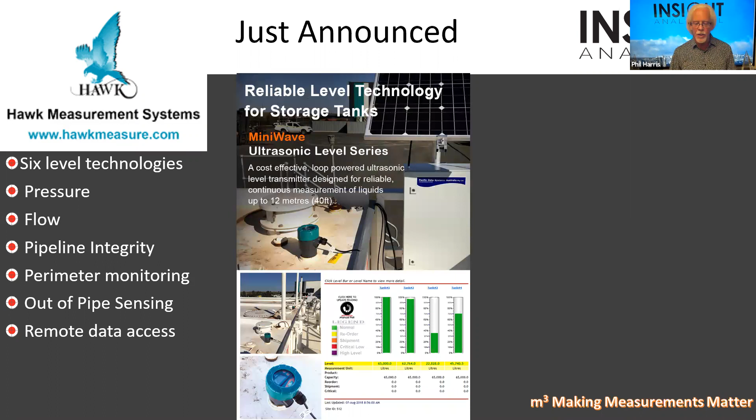We've recently brought on the whole Hawk measurement line as well, which allows us to do multiple different things, from flow measurements and level measurements with ultrasonic, to fiber optic integrity measurements, so we can go on 40 kilometers of pipeline and say where you have a leak based on the fiber optic itself - we shoot a laser down the fiber and look at backscatter off the fiber. We can tell you the temperature, the strain, and if there's vibration on the fiber.

So we can use that on conveyor belts for looking for vibration. We use it on pipelines for looking for the vibration and the temperature cooling that happens when you get a leak. And we're going to do, Scotty, when were we planning - about 10 days from now, I think we're going to do a webinar on fiber optic sensing, Wednesday, August 19th.

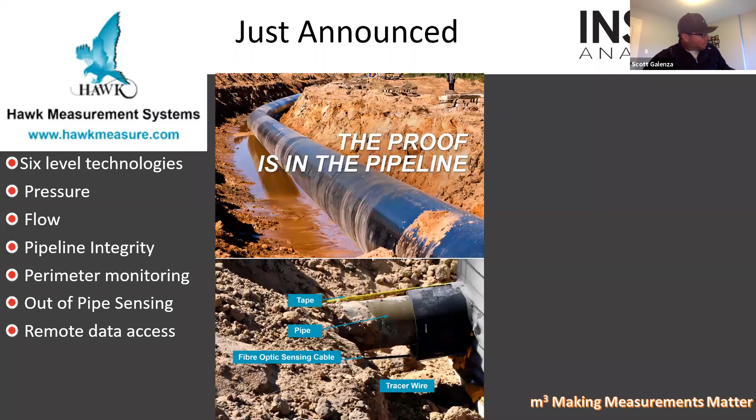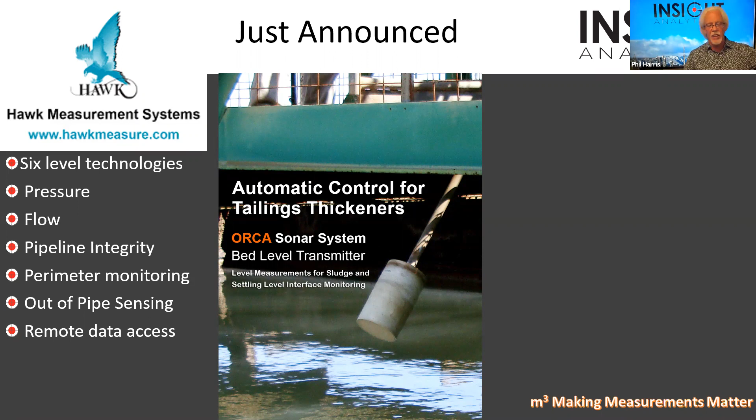We use guided radar, which we can use in high temperature bitumen tanks. We use these in a lot of places - we just did an application for guys that are making wood chips and wood pellets. Tailings ponds, we use a sonar type device. We can tell you where the pond bottom is, and also the layer that occurs where it hasn't fully settled out yet, but you have kind of this viscous layer in between the two. So we can get multiple levels in something like a tailings pond.

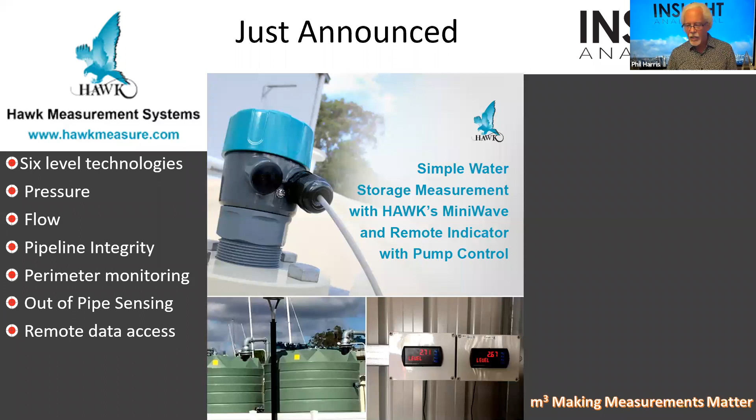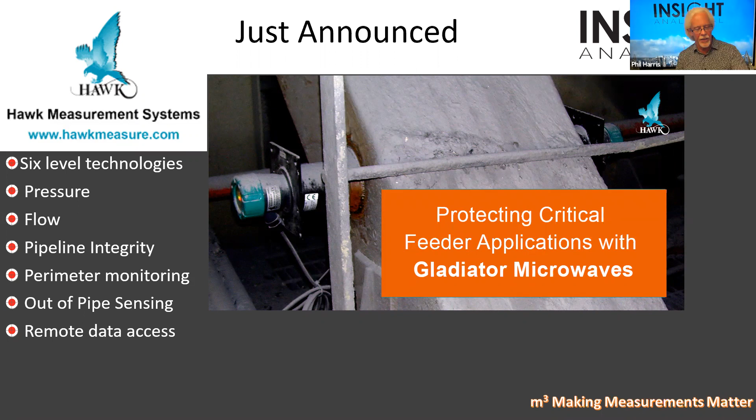Simpler ones, just a simple acoustic type sensor for relatively simple applications. For feeders, we can use a gladiator across a conveyor belt, or a system where we want to see if we have like a blocked chute - whether we have things like bitumen blocking our chute so we can't move things anymore - to free space radar that can shoot down through narrow ports. So again, we can pick up things behind a grill or a grate.

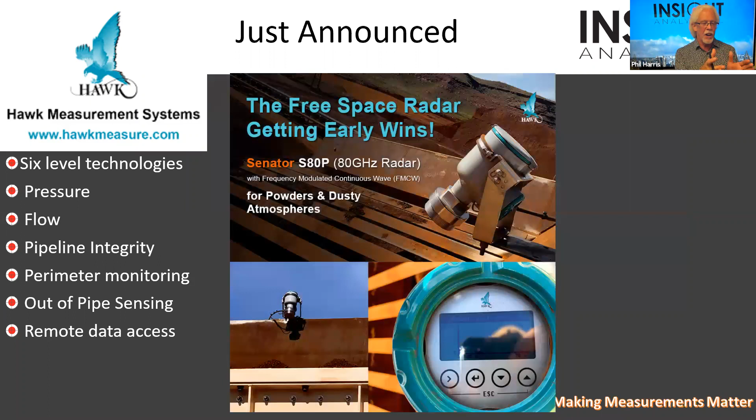And fly ash hoppers, a bunch of different technologies for level measurement. The fiber optic one is especially interesting - it uses 3 types of spectroscopic backscatter and tells us basically the strain in the pipe, the temperature, and whether there's vibration. So we're doing an application with Teck Cominco on a conveyor belt, and they want to know, are my bearings overheating on my conveyor belt? We run fiber along the whole conveyor belt, and we can tell you where the hot spots are.

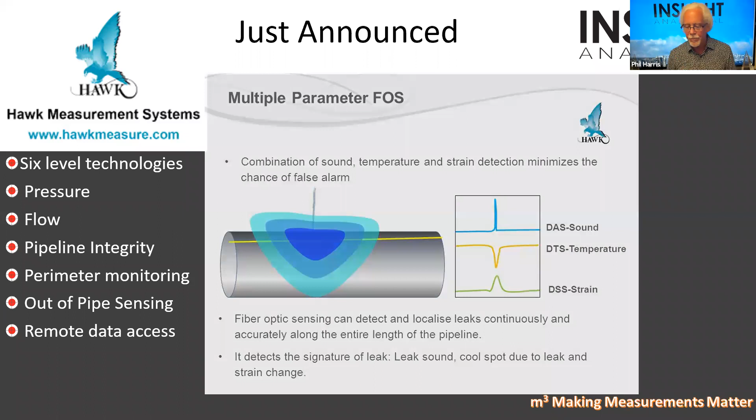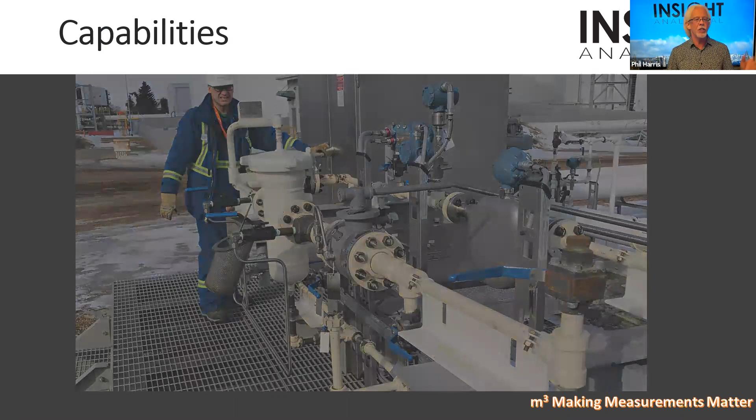So that's a bit of my sales pitch. The last piece of it is just a little bit of animation of some of the stuff that we integrated. As I wrap this up, I just want to say that we try to be a value-added solution provider. We try to understand our customer applications, build things customized to the systems that they want to see done and to the application that they want to do.

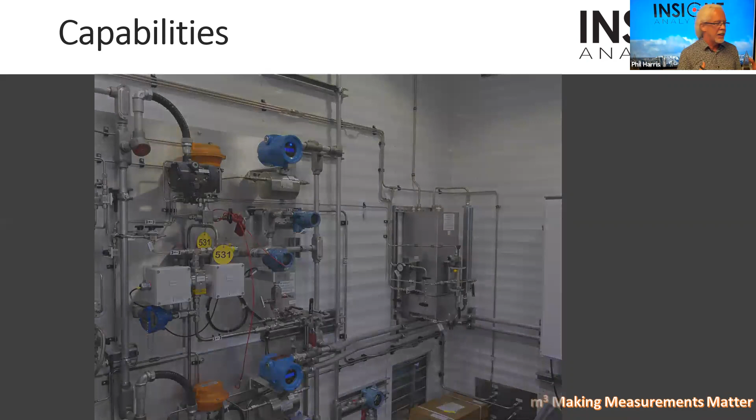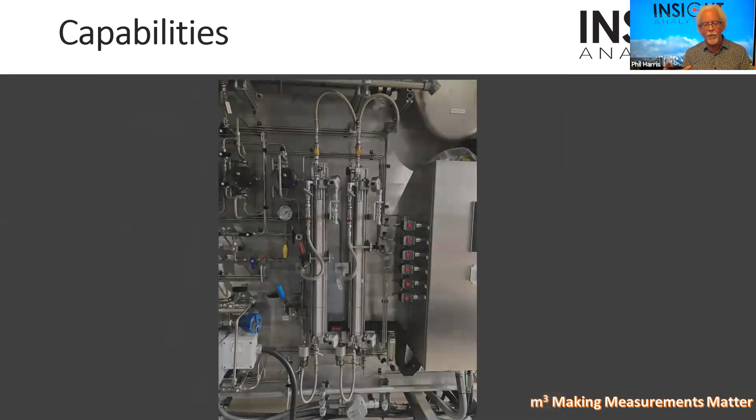I've got a pretty great staff. Most of us come from either engineering technologists, engineers, or scientists. We're a largely technically focused company with, of course, some sales arm because we've got to get our product out there. But what we're really out there to do is help you find a solution to what you need to get done.

So with that, I'll wrap it up and say we're primarily measurement guys. We've been very Western Canadian centric, with a strong service group out of Grande Prairie, Edmonton, and Calgary, plus an analyzer, sample system, and shelter design team. I teach courses on sample systems all over the world - well, used to. Now I get to do them in front of a camera like this to people all over the world. We're happy implementing solutions like this for clients across North America.